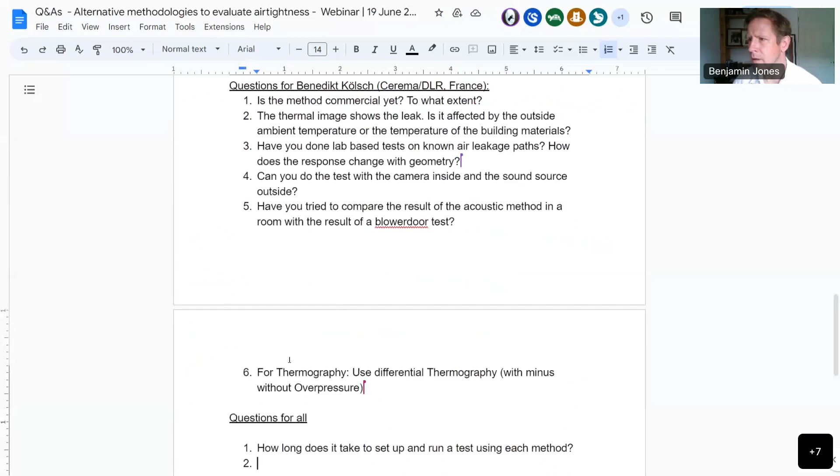Benedikt, I've got a few questions for you. You'll be pleased to hear. Of course.

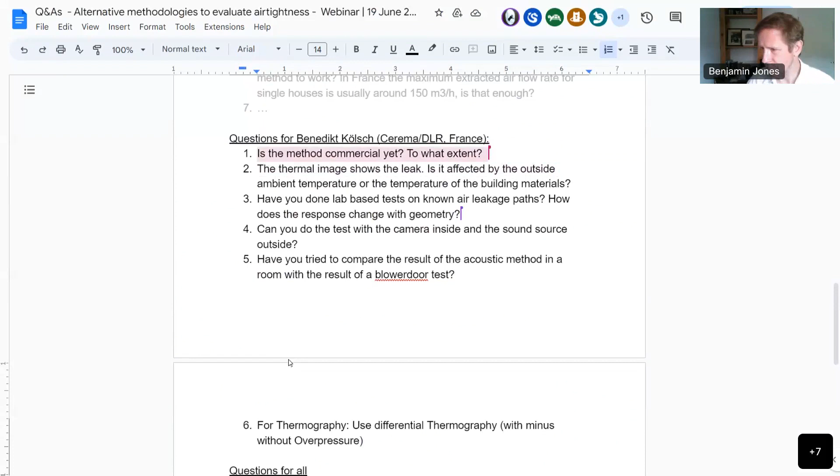The first question is about the commercialization. So is the method close to commercialization? Is it commercialized yet, and to what extent? And if not, how long do you think it might take to do that? So with the current project which is going on, there might be a collaboration with the manufacturer of these acoustic cameras. So acoustic cameras are already available commercially and for different extents.

However, they are commercially not used for buildings yet, as far as I know. So this combination is not commercially available yet. So this will be developed. I mean, the typical research project goes like 3 years or something. So the goal might be to commercialize this at the end with the manufacturers of these systems. I cannot say when this combination will commercially be available. Okay. But the subsystems are.

Yeah. Yes, thank you. So our next question asks, so that the thermal image shows the leak, is it affected by the outside ambient temperature or the temperature of the building materials? It's affected by the temperature difference between inside and outside. However, it's of course affected if you have sun shining on the facade. It's very hard because you have a very high temperature on the facade to really detect it, and it's affected by the material properties of the materials outside. So like emissivity and roughness, of course, as well.

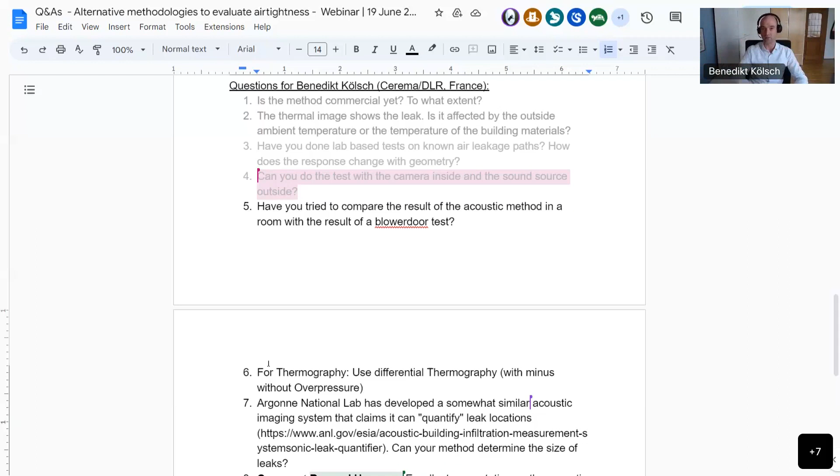So that's basically possible. All right, so you're then just limited by the amount of time that it takes you to set up your equipment. Yeah, I mean, when we did the measurement campaign, it took us longer because we repeated the measurements and everything, but basically the measurement itself was only 4 seconds.

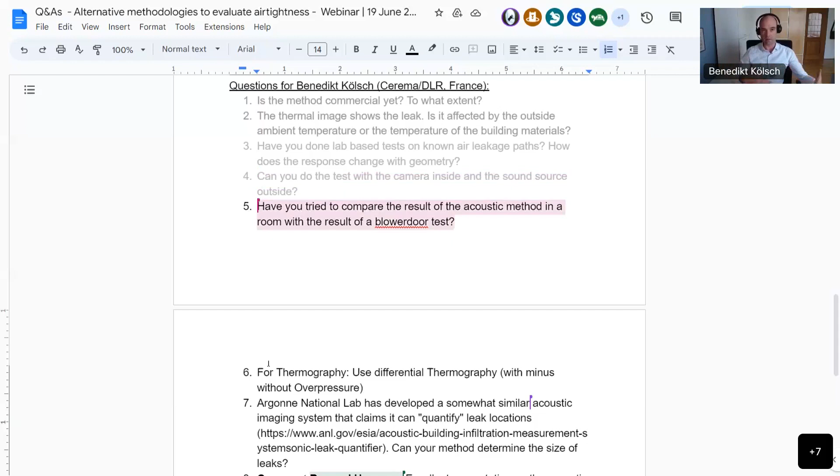Yeah, great. Next question asks, have you tried to compare the results of the acoustic method in a room with a blower door test at all? Yeah, we did it in a laboratory setup where we simulated the fan pressurization method and made acoustic measurements and tried to compare them for different kinds of leaks using insulation material. In between, we created some artificial walls, like single walls, double walls with different kinds of slits.

And yeah, we were trying to compare the amount of airflow at 50, 10, 4 Pascal with the fan pressurization method to the acoustic method, which was somewhat possible, but with a large error. So this needs some more elaboration to really quantify the leaks at that point, or to get the information about the geometry.

So I have a question here. I think it's not a question, it's more of a statement, which says, for thermography, consider using differential thermography. Yeah, I mean, of course, we work on differential thermography and other kinds of methods with thermography. We're thinking if it's possible to use it with or without a blower door. For differential thermography, you need a blower door.

Could you maybe explain to those who are unfamiliar what it actually means? Okay, I can. If you do a measurement of a facade without having a blower, and then you turn on the blower door for overpressurization, so you force the cold air or warm air through the leaks, and then you make a difference between both measurements, you're seeing just the differential temperature, and then you see the leaks clearly outside.

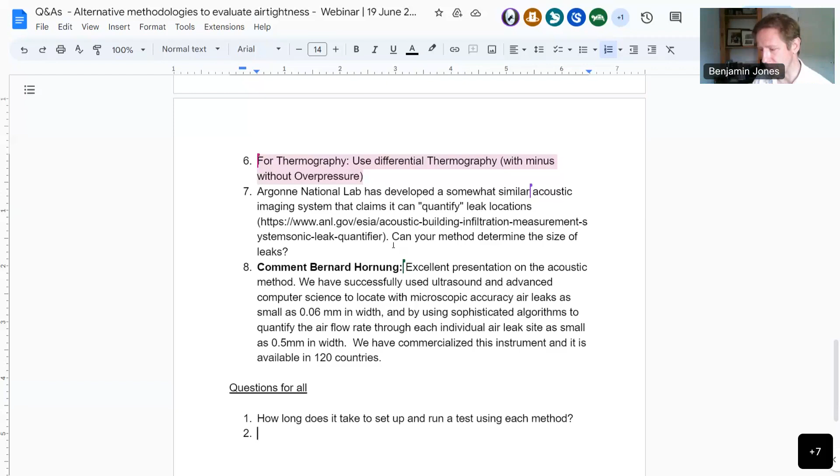And if you make a Fourier transform of the outside image, you can really detect the leaks only at very small frequency changes at that point. So this is what we're trying to do. Great. Combine these things. I can see that would help remove noise. Indeed, that's the case. That's the goal, indeed, yes.

So two more questions. The first says that the Argonne National Laboratory has developed a somewhat similar acoustic imaging system that claims it can quantify leak locations, and there's a link for those who can see the screen. Can your method determine the size of leaks? So that goes back to the geometry question, I think. Indeed, yes. I know the method from the Argonne National Lab. However, I've never been in contact with the colleagues there, so I would be happy to discuss that with them. It is not yet reliably possible to determine the size.

However, as I said, there are some indications that it's related to the wavelength and therefore the frequency of the sound source. So it might be possible, probably not to get the exact size in the future, but the goal is to get some prioritization, so to say. These are probably the major leaks, these are the mid-size leaks, and these are probably the small leaks. Not saying this leak has an area of X square millimeters, but saying these are large, mid-size, low. This might be possible in the future, I think.

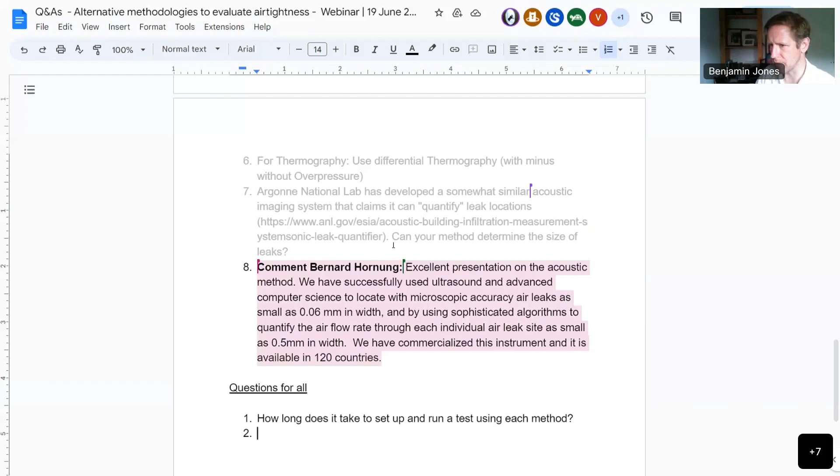And the final comment is from Bernard Hornung, who commends you on your presentation, says it's excellent. He says that he has successfully used ultrasound and advanced computer science to locate with microscopic accuracy air leaks as small as 0.06 millimeters in width, and by using algorithms to quantify the air flow rate through each individual air leakage path as small as 0.5 millimeter in width. He says that he already has a commercialized tool available in 120 countries. Maybe that's something worth checking out. Yes, definitely. Thank you.

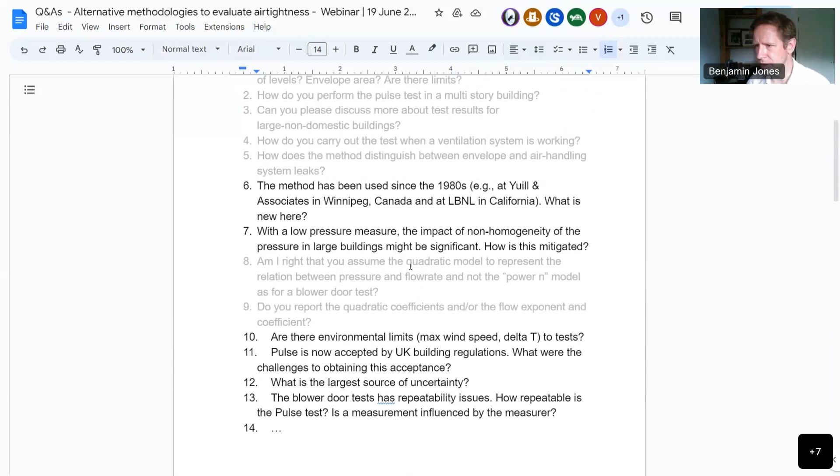There's a question, some comments coming in. The first says that this method's been done before, perhaps in the 1980s, and so the question is asking for some clarification on the novelty. Maybe I can touch on that. Can you hear me okay? Yes, Ken, you sound great.

Oh, good. Sorry if we gave you the impression that we're trying to say this is a new method developed by us. Certainly that's not true. It's a method that has been tried out by many organizations. I think, for example, Max Sherman tried it in 1986, and there are publications available. Rumor has it he actually had a conversation with our late David Etheridge about it before. I think the main challenge was the accuracy was not good enough, and I think something new we tried is kind of a scientific approach.

That is new because we try to use the quadratic equation to isolate the unsteady term. Then we're able to develop the optimal configuration, for instance the combination between tank size and orifice size. So we're able to achieve a minimum unsteady term, so we can make sure accuracy can be maintained. Hope that answers that question.

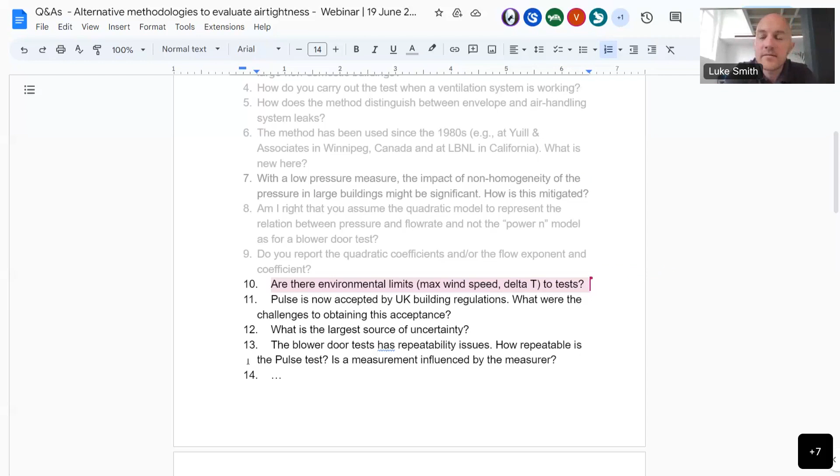But that's not to say, and I know Ken and Chris have been involved in a lot more research around this, that given the short nature of pulse, the quasi-steady period is only 0.6 or so of a second, and the fact that you don't have any pressure tappings, so you're not penetrating the building envelope, you're sheltered within the building itself. The method is also quite resilient to gusting conditions, and with experience you can work in more gusty conditions than those 6 meters per second or so.

But that experience is an interesting point. Maybe I'll open that up to all three panelists representing all three technologies, because I'm interested in how susceptible the test is to influence by the person doing the measurements. Maybe all three technologies could comment on that, starting with Niek.

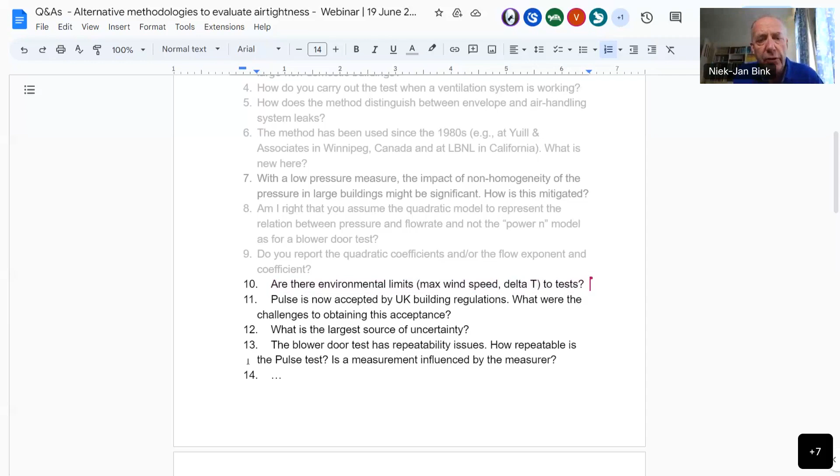Yeah. First the person, but I'd also like to comment on the wind thing. Since the reference vessel is inside the house, if you are in a relatively tight house, you can do excellent measurements even with quite some wind, although you of course get some delta P effect of windward and lee side effects. We did, in a passive house, at Beaufort 7, a measurement that was later repeated by blower door and gave very similar results.

And then to the person doing it, like the blower door measurement, whatever measurement you do, you need to be trained and you need to understand what you are doing. So with the blower door test and with our test, you have to prepare the house according to the rules set for this kind of testing. You have to close the mailbox, etc. So yeah, there is some influence for sure. Sure, and in that sense it's no different to the blower door test because they all need to be sealed up too. No, by all means, it's the same.

Have others tried to repeat your tests? Yes, absolutely. We have sold a few of the units in the Netherlands, and there is a nice little movie on YouTube from The Hague. The municipality has bought an ATT, and the guy working there has done a lot of apartments with mechanical ventilation systems. Some of them he did with blower door, and a lot of them with the ATT, and he had no problem at all doing this.

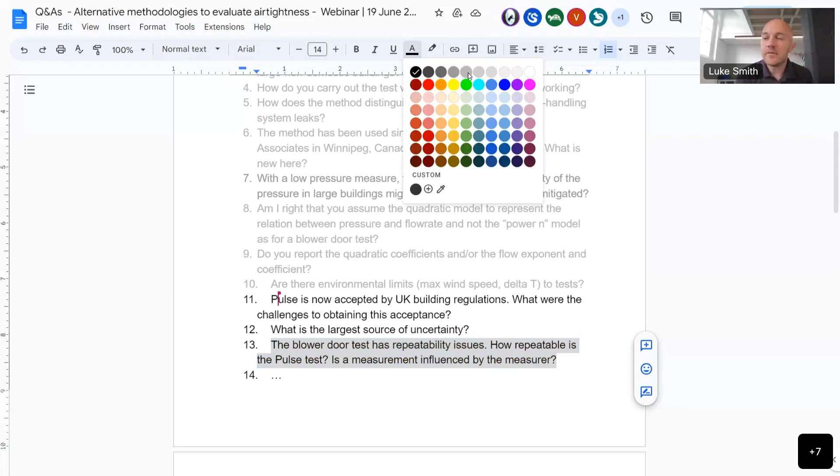I think we've got 1 minute left, and what we've identified today is we have 3 different test methods that are at very different technology readiness levels. And Niek's clearly highlighted struggles he's having to get his technology recognised, and Benedikt, no doubt down the line, will have to face these points too. I wonder whether Luke, and Chris and Ken, you could share the benefits of your experience and how you overcame the most significant hurdles to have the technology accepted by the UK government.

Yeah, we bear the scars. I had hair before I embarked on the whole Pulse journey.

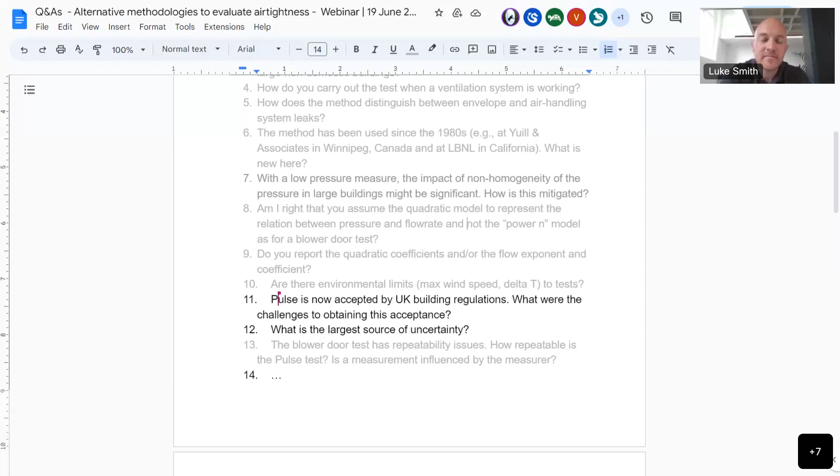Don't get me wrong, it's been a real challenge, and obviously air tightness testing in the round is a great thing to be doing, and I think everyone on this webinar will be of that view, and we should be testing more buildings. Every building should have an air tightness test, and so it's really exciting that there's some great innovation out there, but it's not easy when you've got the incumbent blower door fan, as you touched on at the start, Ben, that's been around 30-40 odd years, and that's, dare I say it, had a relatively easy ride. It's been kind of the only show in town and established itself in these international standards.

And so we've had to really raise the bar, and I don't want to speak out of turn, but the level of testing, verification, comparisons with other methods that we've done, the number of papers that are out there on the Pulse technique, it gives the blower door a run for its money, I think. It still seems early days to having conversations about the issues of repeatability with the blower door, or where it's susceptible to certain environmental conditions. So actually only by having these new methods come in do you then have a means of comparison.

And it's slow, time consuming, hard work, and there's no substitute for lots of field work and validation, and finding the right people to speak to, the right stakeholders in government, and governments with the right attitudes towards innovation, I guess.